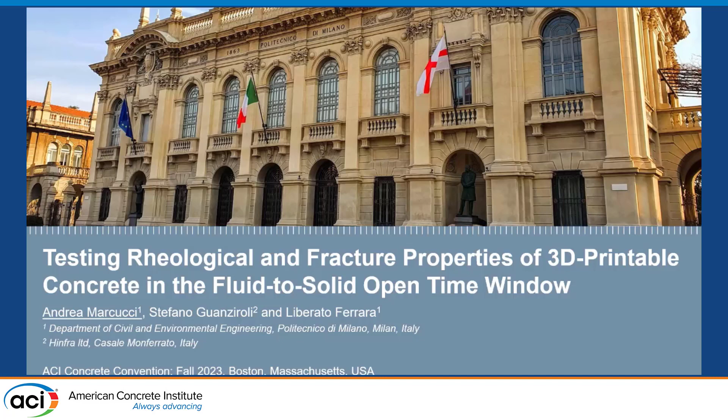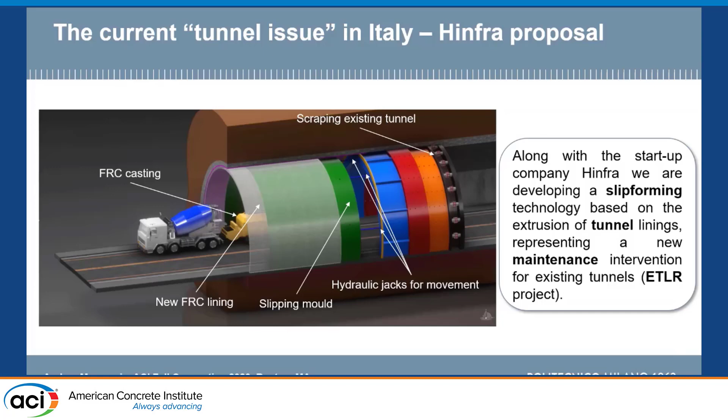placing the mold again under the scraped surface. And in this movement, the mold slips against the concrete. So we name this a slip forming process for the maintenance of existing tunnels. This slipping of the mold happens when concrete is still in its plastic state, before the hardening of concrete.

To assess the feasibility of this methodology, we started from small scale testing, and this was made thanks to the use of a robotic arm that is commonly used for 3D concrete printing. In this case, a tunnel-shaped mold has been mounted on the nozzle in order to give the shape during the extrusion. As you can see, there are some similarities between this technology and 3D concrete printing, especially in the material requirements. As a matter of fact, the material must be buildable in order to start the slipping of the mold, so that the segment can sustain its own weight.

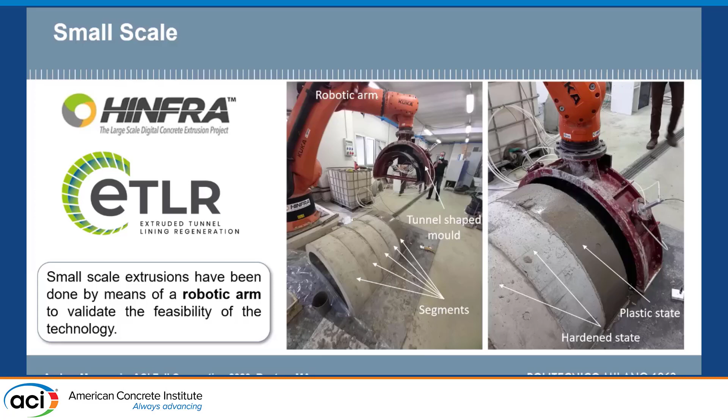And then we moved to a larger scale, in particular a one-lane tunnel scale. In this case, we have also built an external mold that simulates the existing tunnel, and the internal mold is mounted on top of a steel frame that moves on rails. The internal mold is placed below the external mold, concrete is cast, and when it's ready, the mold starts slipping.

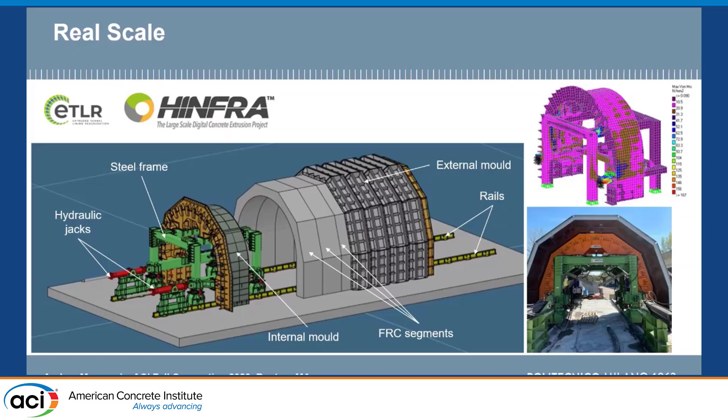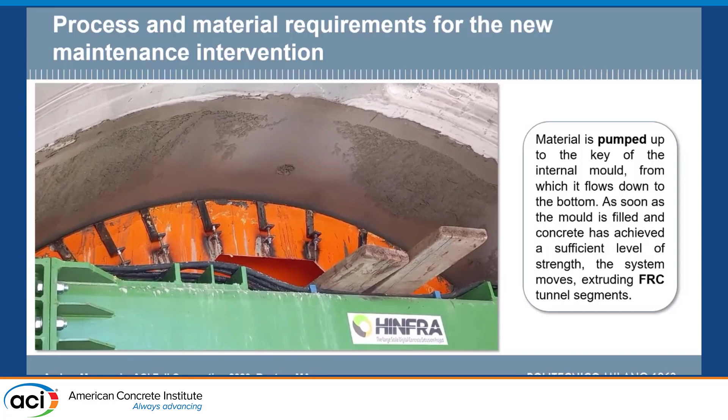And this is how it works: the mold moves, extruding tunnel segments. In particular, as you can see, this movement happens when concrete is not yet in its hardened state. So it's important to understand the right time at which the mold starts slipping. And for this reason, we have introduced this new testing methodology.

It is based on shear box tests and tensile dog bone tests. Both tests work with one half of the sample that moves against the other. In particular, for the shear box test, this half slides against the fixed one, generating shear stresses in this cross section. Whereas for the tensile test, one half moves away from the other, generating tensile stresses on one of these cross sections with reduced area.

The movement is generated by a motor that moves with constant velocity: 0.1 millimeter per second for the shear test and 0.05 millimeter per second for the tensile test. Then an LVDT measures the displacement during the test, and a load cell records the load required for the movement, so that the output curve is load versus displacement, and it is processed in order to obtain the stresses from the load. So the final output of the tests is the stress-displacement curve.

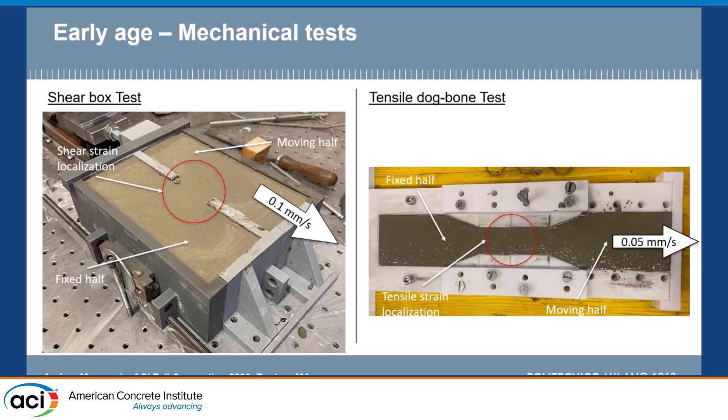This is the mix design adopted during the experimentation. So we have 600 kg per cubic meter of binder, made of 30% CSA and 70% Portland. 1400 kg per cubic meter of aggregates, mainly sand with a maximum diameter of 4 millimeters.

In this case, the aggregates are different compared to the real scale application. We have just adopted a new size distribution for the tests. Water binder ratio is 0.35, with superplasticizer, and then three quantities of retarder. So at the end of the day, we have three different mixes, and this was useful to understand the effect of the retarder in delaying the setting time, so the time at which we want to move the mold to slip and to extrude the segments.

And this is the mixing procedure. We first add the powders, like aggregates and retarder, then we wet the aggregates, after which we add the binder, and at this time the clock starts.

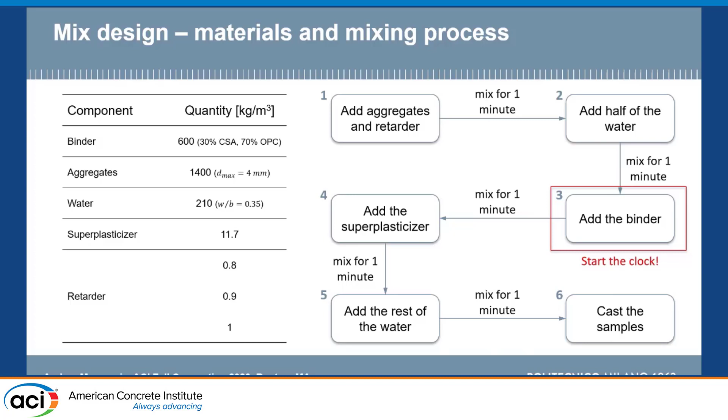We have also performed some Vicat tests in order to establish the right testing time for these three mixes. In particular, this is the testing time window we have selected: from 45 minutes to 90 minutes, testing every 15 minutes.

We don't go beyond 90 minutes because the material is otherwise completely rock solid and out of the scope of this experimentation. We didn't use more than 1 gram per liter of retarder, because otherwise the material is still too fluid even after 45 minutes. And then we have averaged the curves because we tested at least 3 times at each testing time for each mix.

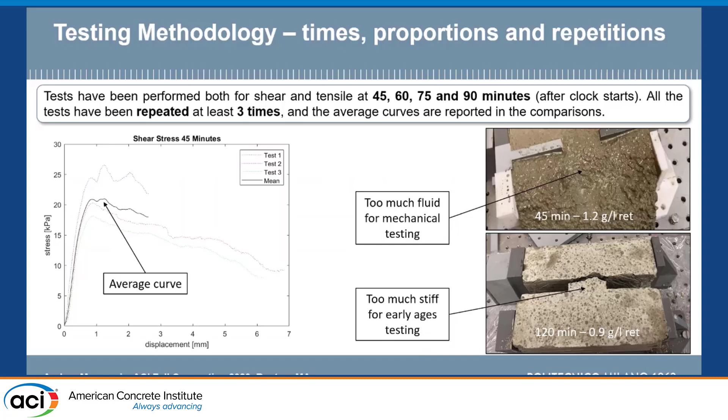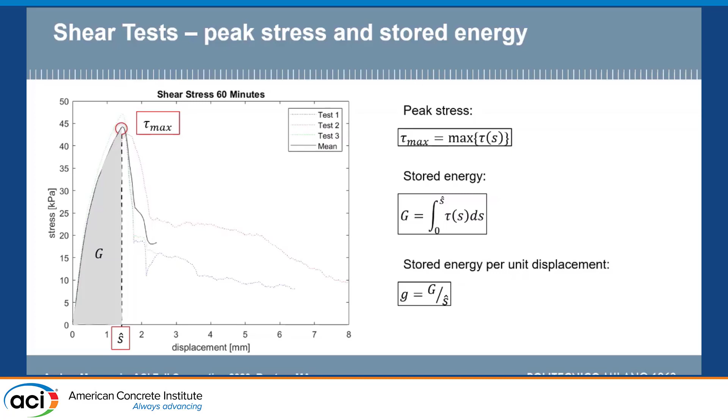So this is an output of the shear test curve, for example here at 60 minutes. We are particularly interested in the peak stress and also in the stored energy, that is, as you can see here, the area below the curve until the peak stress. To make it independent of the displacement, we divided the energy by the displacement corresponding to the peak, obtaining a stored energy per unit displacement.

So these are the results for the retarder at 0.8 gram per liter, and as you can see, there is a clear distance between the 75 and 90 minutes curves compared to the first two. In fact, there is almost a phase transition, so that at 75 minutes the material is almost solid, whereas at 45 minutes it is plastic, as you can see here from the picture, but with limited strength that starts developing only at 60 minutes, where the material is still in its plastic stage.

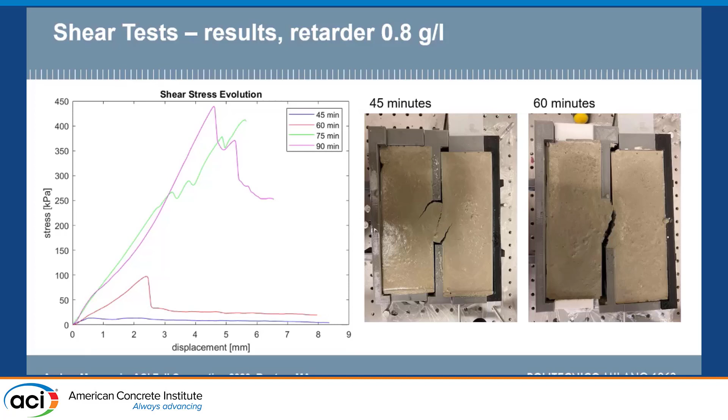As you can see, there is an exponential increase of the strength between 60 and 75 minutes. There is a sudden increase of the strength with quite a high variability of the results. That is due to the fact that there is a very large increase of the strength in a very limited time window of only 15 minutes, which made it difficult to obtain the same repeatability of the results that we got at earlier times. And this is valid both for the stored energy and the peak stress.

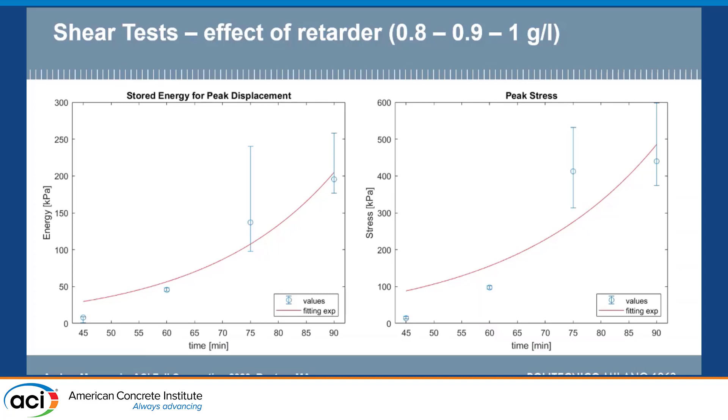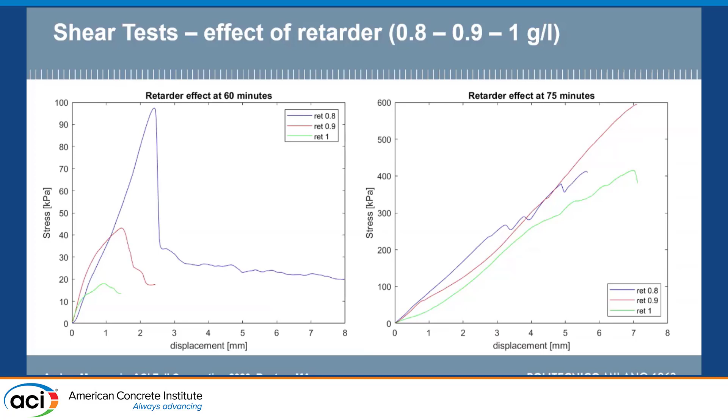This is the influence of the retarder. So at 60 minutes, we can see a clear dependency of the strength on the retarder. As a matter of fact, the higher the retarder, the lower the strength. Whereas at 75 minutes, we no longer have the effect of the retarder on the development of the strength. In fact, as you can see from the curves, they are pretty much close to each other.

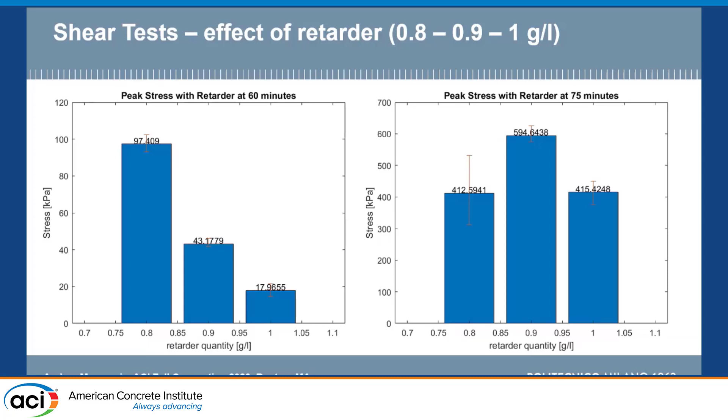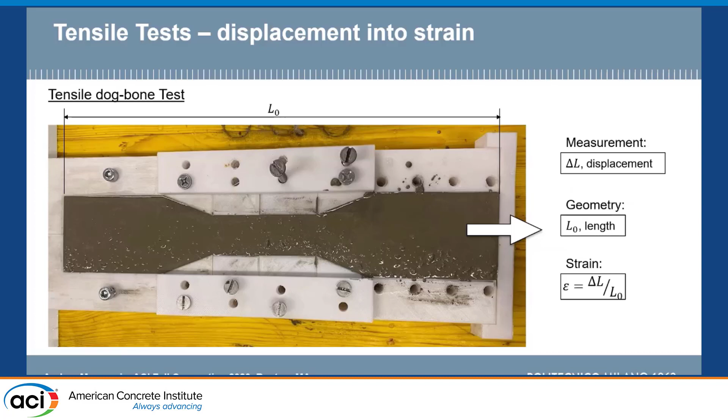Then for the tensile tests, we have processed the output of the test more. We have also computed the strain, so as to obtain a stress-strain curve. We obtained the strain simply by dividing the displacement measured during the test by the initial length of the sample. And this is what we got from the tensile tests. So we were interested again in the peak stress.

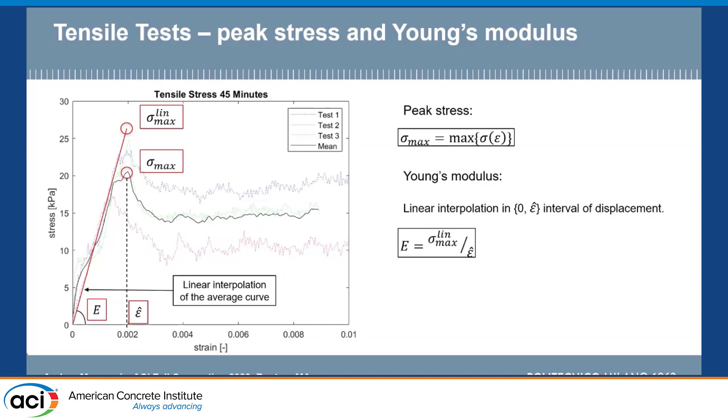And then we have also tried to measure a parameter that belongs to the solid state, but we measured it here in the plastic state: the Young modulus, by linear interpolation of the first branch of the curve until the peak stress. So these are the tensile test results, and again at 75 minutes there is a clear increase of the strength compared to 45 and 60 minutes.

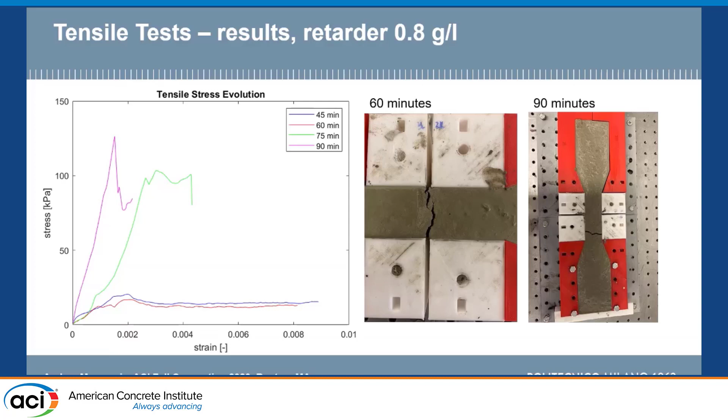But differently from the shear test, we can see that the increase of the strength is a little bit delayed, because at 60 minutes there is no increase of the strength as was happening for the shear strength. In fact, the two curves are very close. But we can still see an exponential increase of the strength if we consider the 75 and 90 minutes.

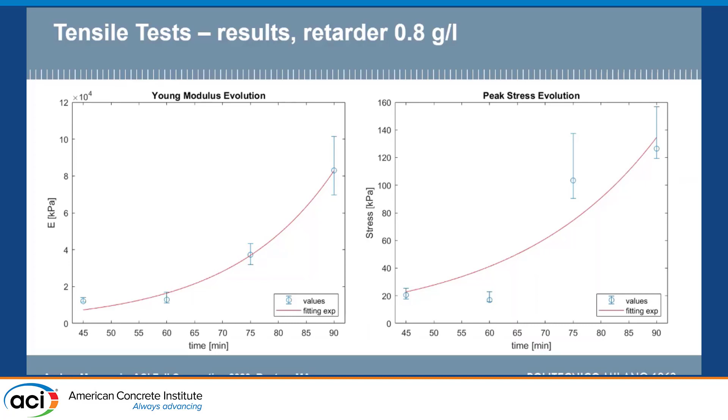In fact, at the beginning, the strength is not increasing, so there is a flat increase, and then an exponential increase of the strength, both looking at the Young modulus and the peak stress. And this is the influence of the retarder. So it seems here it is too early at 60 minutes to see any effect of the retarder on the strengths, whereas we can see instead at 90 minutes the effect of the retarder.

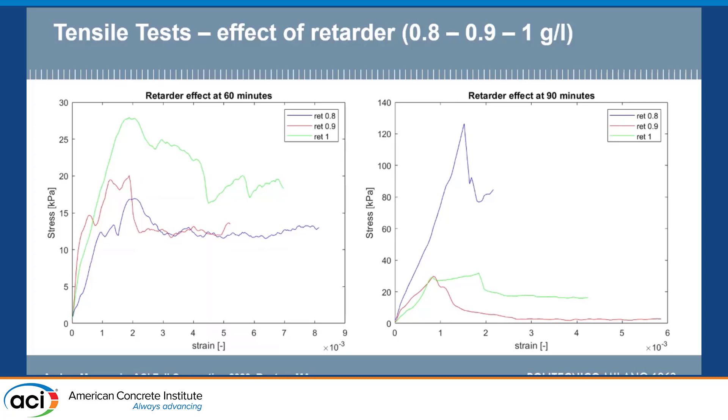In fact, for 0.8 gram per liter of retarder, there is an order of magnitude of difference compared to the other two quantities of the retarder. And this is more explicit by looking at the Young modulus. In fact, no clear trend at 60 minutes, whereas we can see instead a dependency on the retarder, as for the least quantity of the retarder we have double the stiffness compared to the other two quantities for 90 minutes.

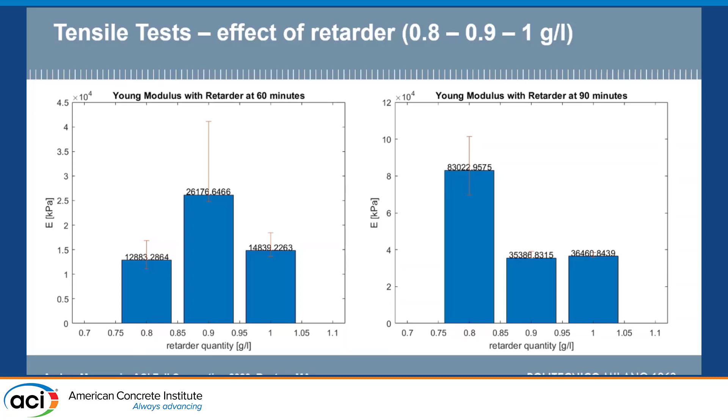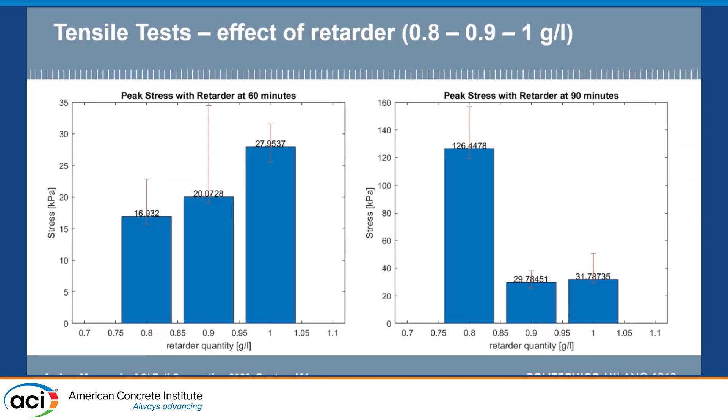And again, no clear trend here, because it's not the case that the peak stress is increasing with the quantity of the retarder, whereas there is a clear dependency on the least quantity of the retarder, as the peak stress is one order of magnitude different compared to the peak stress at 60 minutes if we look at the peak stress at 90 minutes.

So, concluding, a new testing methodology consisting of shear box and tensile dog bone molds has been introduced with the aim of studying the intermediate state of concrete between fresh and solid state by measuring shear and tensile strengths. Thanks to this test, it's possible to study the plastic state of the material.

An exponential increment of the strength over time has been observed both for the shear and the tensile tests. Varying the quantity of the retarder, of course, varies the plastic time window of interest. And the increment of the shear strength is faster than the tensile strength. And this may be due to the faster development of the compressive strength that influences the shear strength of the material.

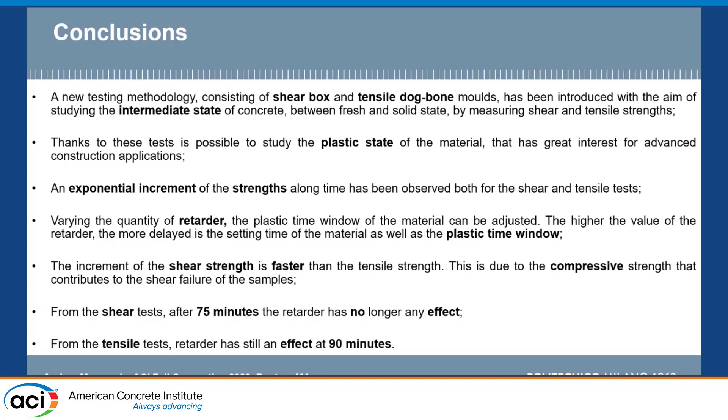For the shear test, after 75 minutes, the retarder no longer has any effect, whereas for the tensile test, the retarder still has an effect at 90 minutes. So, thank you for the attention.

The second part of that is, based on your results... Yeah. Looking at these tests, actually we can say that between 60 and 75 minutes may be the right time. Actually, we have seen that there is a sudden increase of the strength that can be due to the CSA cement in the binder, and for this reason we might have to reduce the time interval during the test, especially focusing on the time window between 60 and 75 minutes in order to be more precise on the time at which we have to flip the mold.